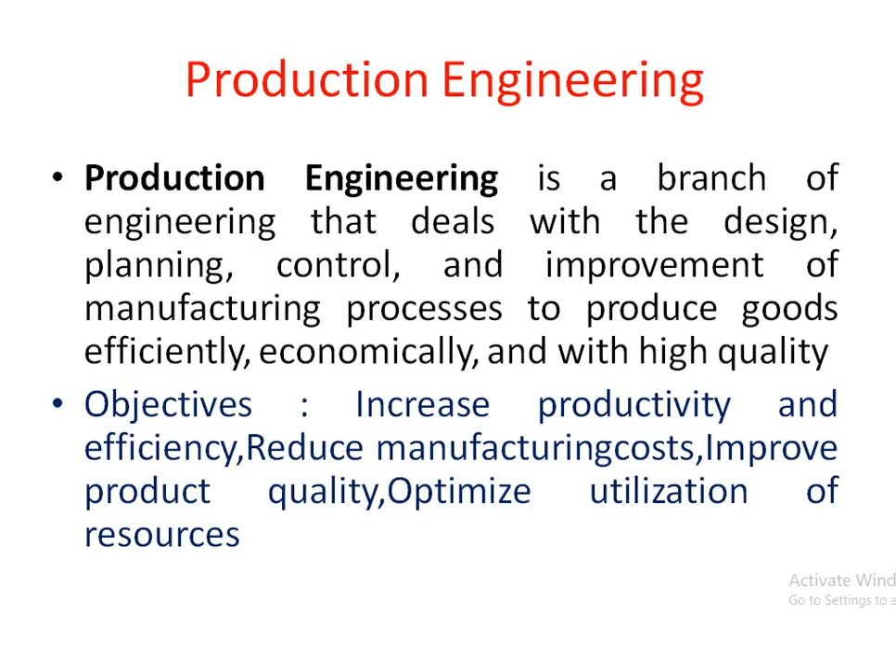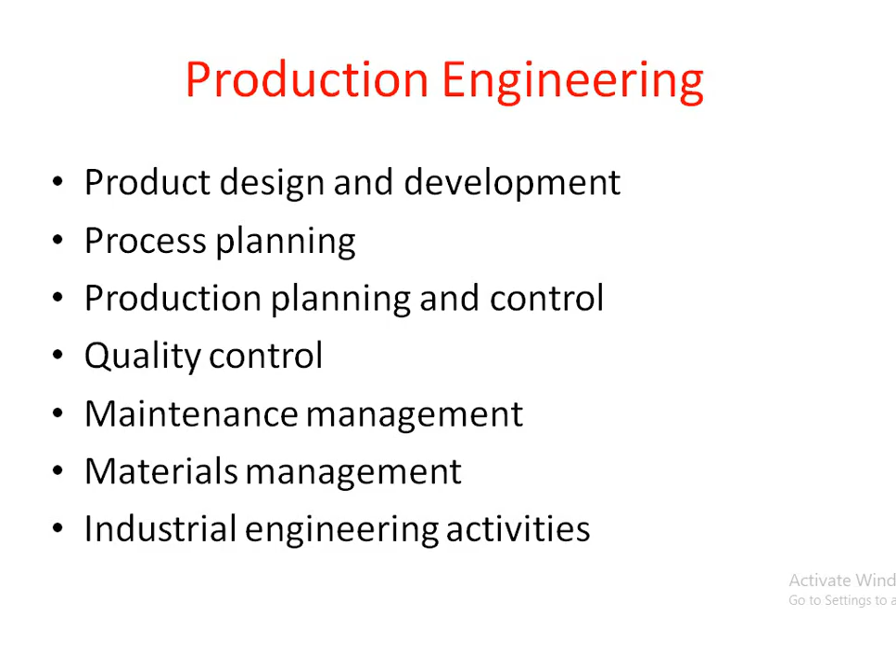The objective of every industry is to increase productivity and efficiency. Apart from that, it is reducing manufacturing cost, giving emphasis on product quality, and optimum utilization of resources. So production engineering covers product design and development, process planning, production planning and control, quality control, maintenance, materials management and industrial engineering activities. All these come under the roof of production engineering.

Today we will have a short difference between manufacturing and production. Manufacturing is nothing but the conversion of raw materials into finished products. That is called manufacturing. But what is production? Production is nothing but the creation of goods or services to satisfy human needs.

So conversion and creation are the two important points to be considered while comparing manufacturing and production. In manufacturing, there is conversion of raw material into finished products, but in case of production, we have to create the goods or services to satisfy the human needs.

So what is the input required for manufacturing? That is raw material, machine and labor. These are the inputs required for manufacturing. But in case of production, the input criteria are resources, labor, capital and technology.

Manufacturing is nothing but conversion of raw material into finished products, and for that you need only raw material, machine and labor. But in case of production, apart from this, you need capital also, technology also.

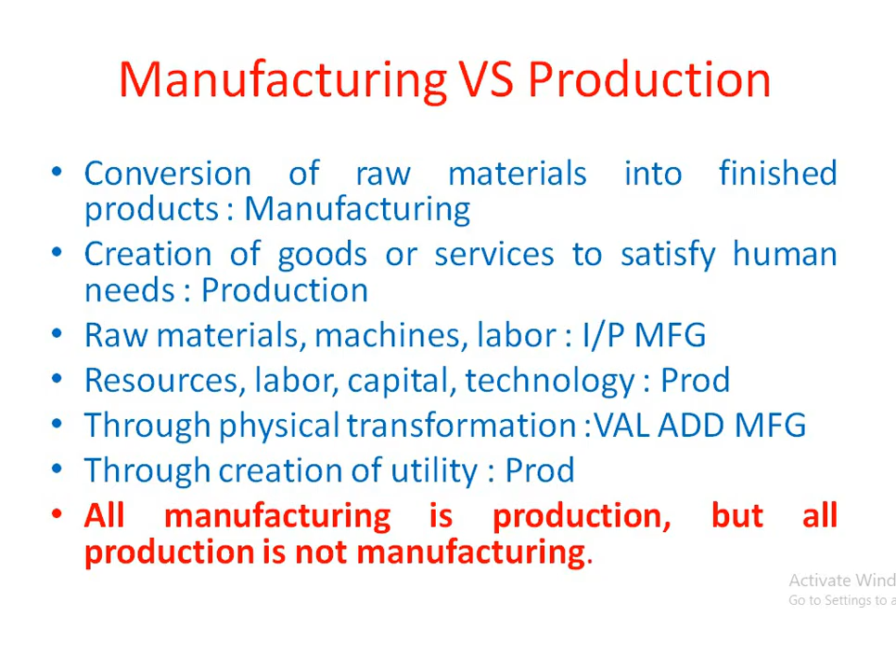In case of manufacturing, we add value in terms of physical transformation - from a particular product or raw material, you give some shape so that you can add value to it. But in case of production, you have value addition as creation of utility. So most importantly, all manufacturing is production, but all production is not manufacturing. Every production is not manufacturing, but every manufacturing is production.

So there are different branches of production engineering, which includes production planning and control, in short PPC. What does it cover? It covers routing procedure, scheduling, dispatching and follow-up. Routing means you have to make a proper route of the material or product flow. Then you have to schedule how to route this. And also you have to have dispatching idea - how to dispatch, where to dispatch, and where to stock the products and how to dispatch it, and most importantly you have to take the follow-up of all the things. This is the role of a production planning and control engineer.

Industrial engineering, one of the finest branches of engineering, deals with work study, time study, method study and productivity improvement. One more thing I will add is work measurement. So work study, time study and method study are important parameters for any manufacturing industry.

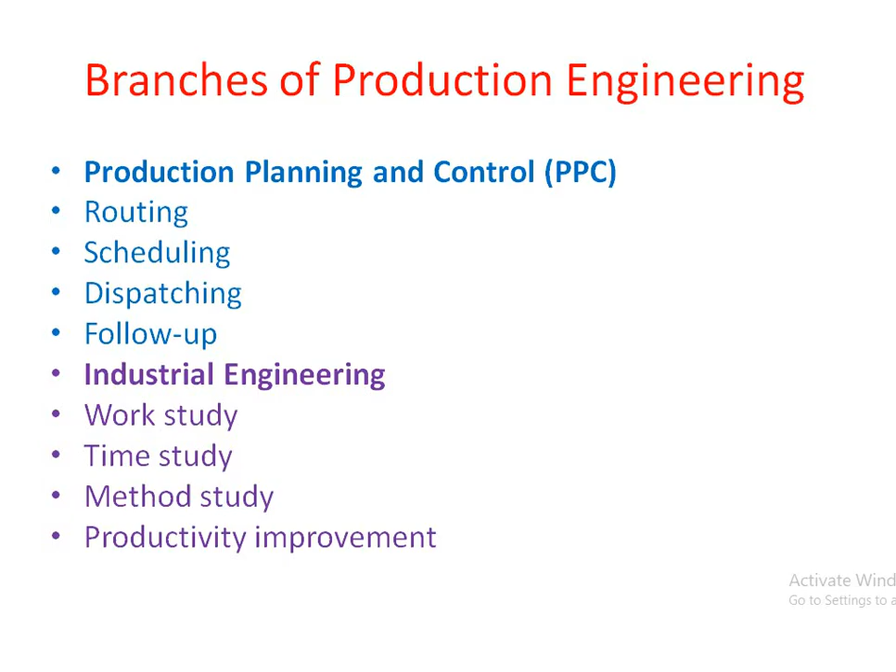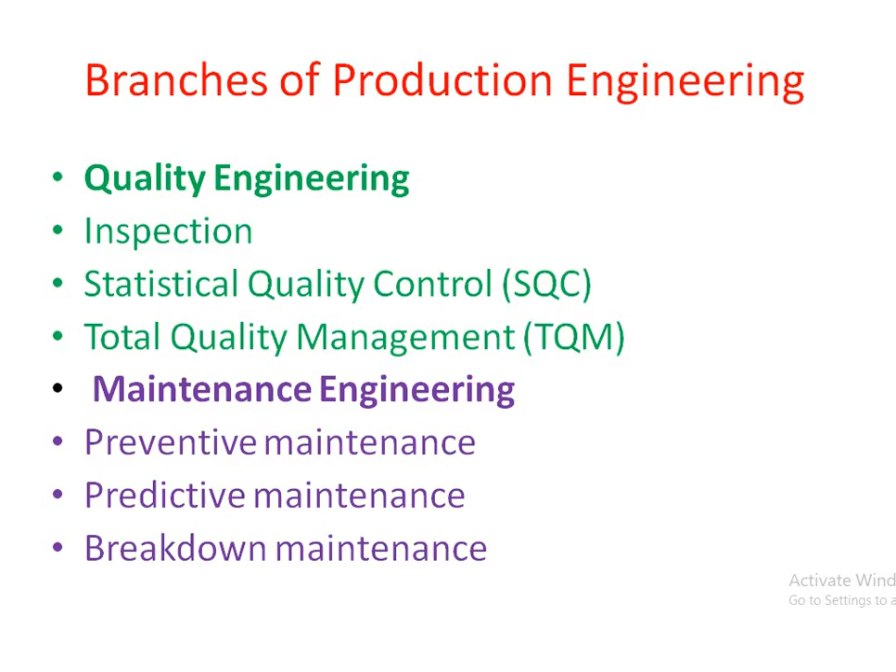Quality engineers will do work like inspection, statistical quality control, and total quality management. Maintenance engineers will do preventive, predictive, and breakdown maintenance. Material management plays an important role in controlling inventory, making purchases of material, and storing the material. Operation management or the operation engineer has to work on resource allocation, proper planning that is capacity planning, and production scheduling.

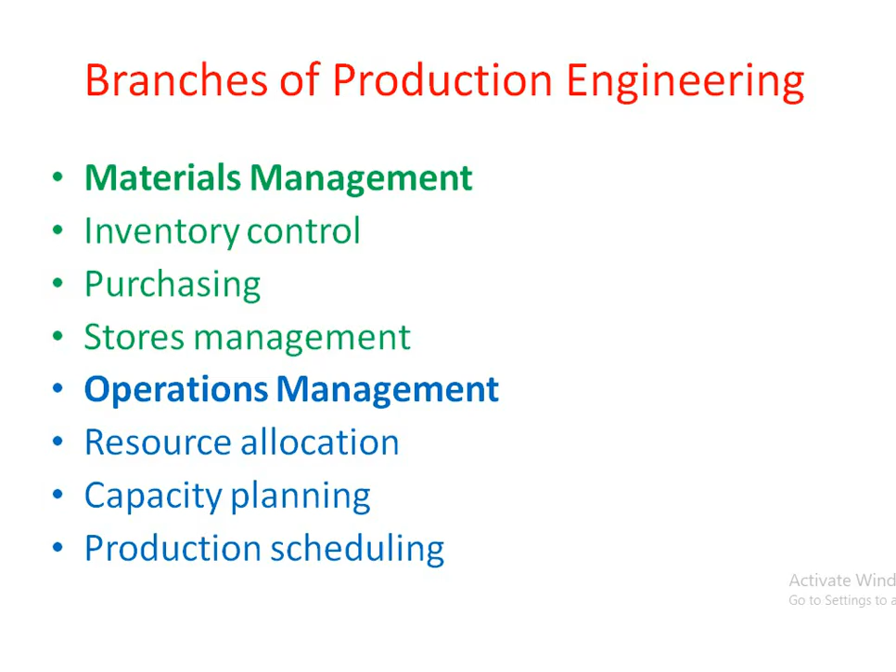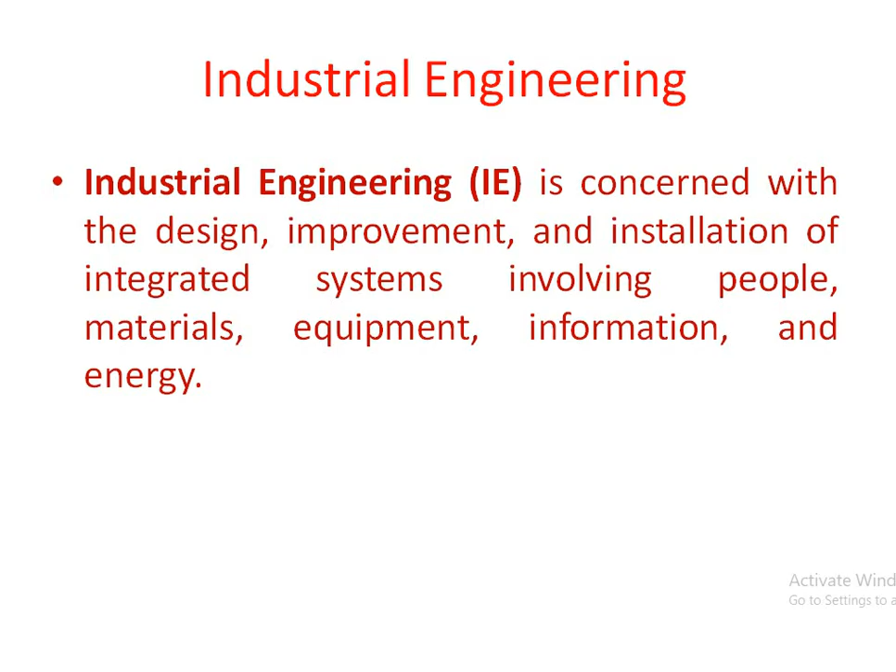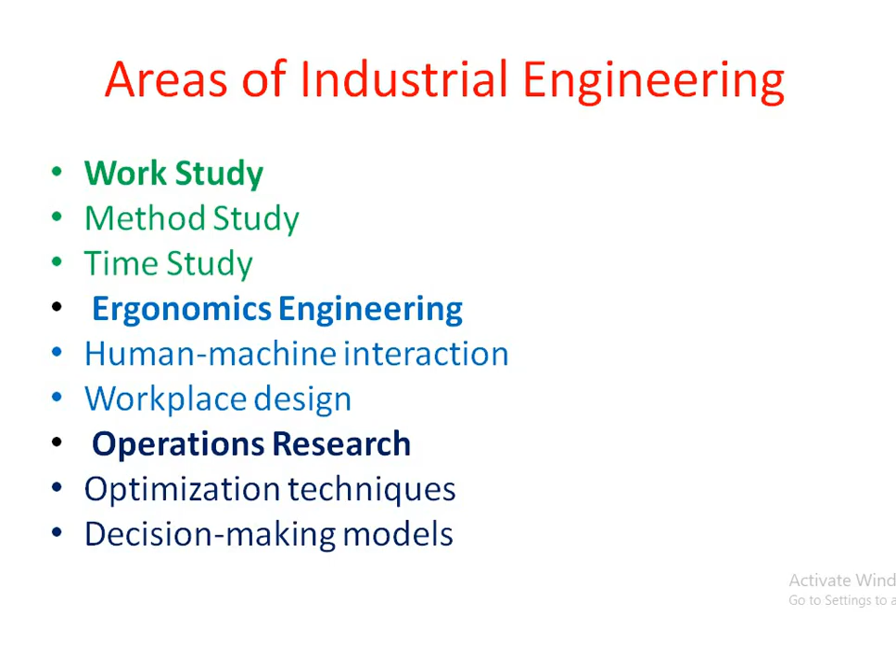So once again I am giving emphasis on industrial engineering, which concerns the design, improvement and installation of integrated systems involving people, material, equipment, information and energy. Broadly, the areas of industrial engineering, as we discussed earlier, are work study, which includes method study, time study, ergonomic considerations such as human machine interaction and workplace design, and operation research, which involves optimization techniques and decision making models.

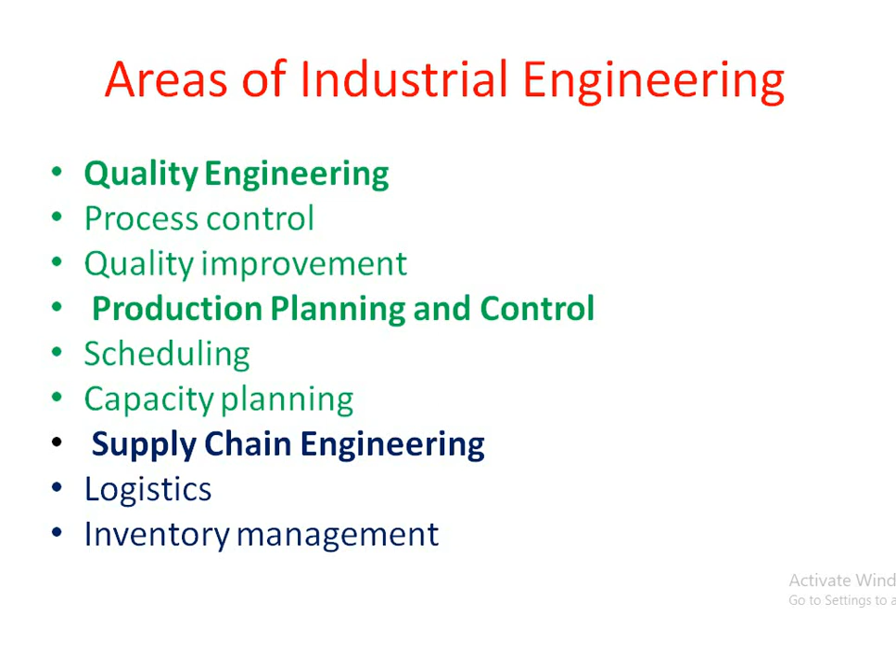Again, we have quality engineering, which covers process control and quality improvement. We also have PPC and supply chain engineering, which is now emerging, that is logistics and inventory management.

So shortly we will discuss work study and method study, an overview. Work study is defined, according to ILO, the International Labour Organization, as the systematic examination of methods of carrying out activities to improve the effective use of resources and set standards of performance.

So work study always does the systematic examination of the methods used for carrying out different activities, which are used to improve effective resource use and set standards of performance. That is, resource allocation and resource utilization are the most important parameters for using proper resources.

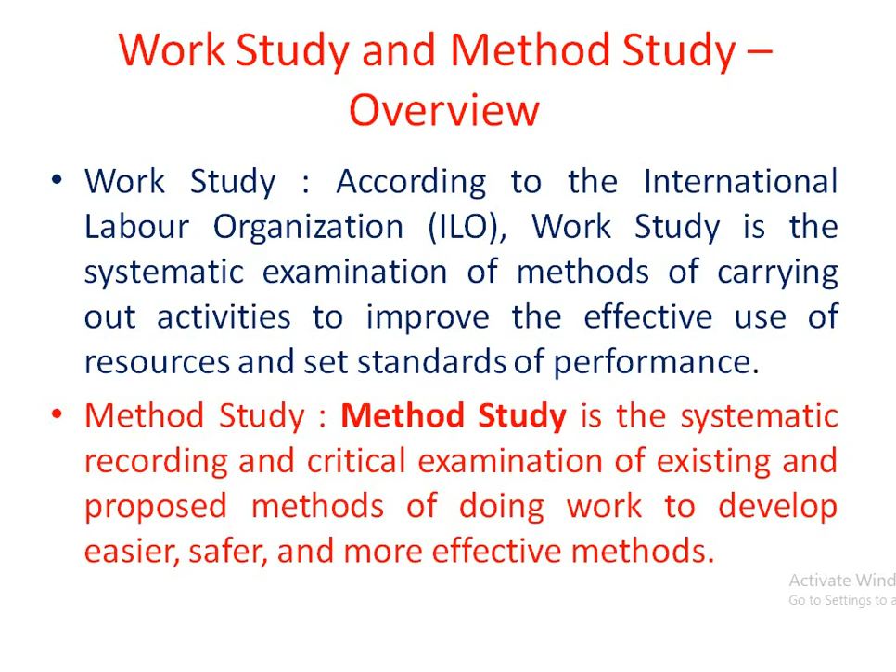Method study is the systematic recording and critical examination of existing and proposed methods of doing work to develop easier, safer and more effective methods. That is, the methods already being done in the industry, you have to record those methods, critically examine them, and you also have flexibility to propose methods that will be easier, safer and more effective.

So how to do method study? This is the way you have to do method study, which is called SREDIM. S stands for select the work to be studied. What work you are going to do, you have to select it first, and then record all the relevant facts regarding that particular work which you have taken into consideration.

Then examine the facts. Whatever facts you have recorded, you have to examine them very critically. Once you do these things, you have to develop an improved method. Again, you compare that method with the previous method, so that if there is any lacuna, you can make those particular changes to develop a very improved method.

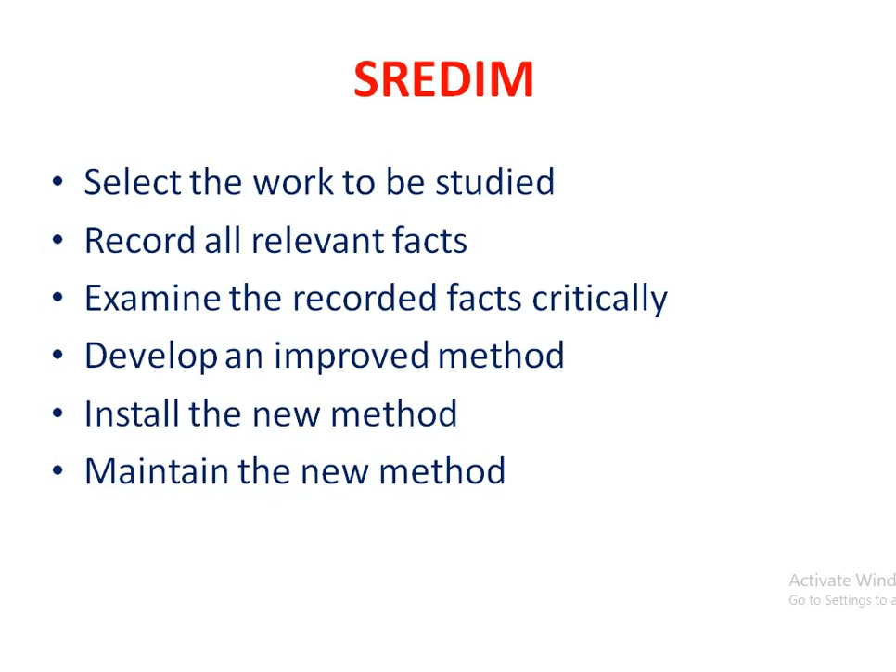Once you have developed that method, you have to install it and then maintain the new method which you have developed.

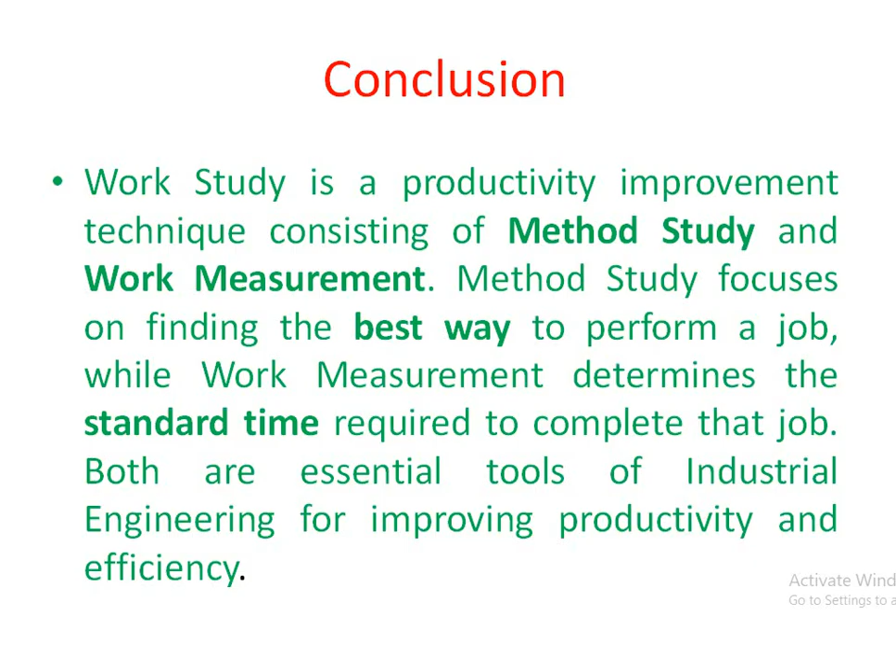So in conclusion, we can say work study is nothing but a productivity improvement technique, consisting of method study and work measurement. So work study has two branches: method study and work measurement. Method study focuses on finding the very best way to perform a job, while work measurement determines the standard time required to complete that job. Both are essential tools of industrial engineering for improving productivity and efficiency.

Now we'll discuss the next part, forecasting. Forecasting is nothing but prediction, regarding what is the demand, what will be the sales, what will be the production, what will be the conditions. All these come under the roof of forecasting.

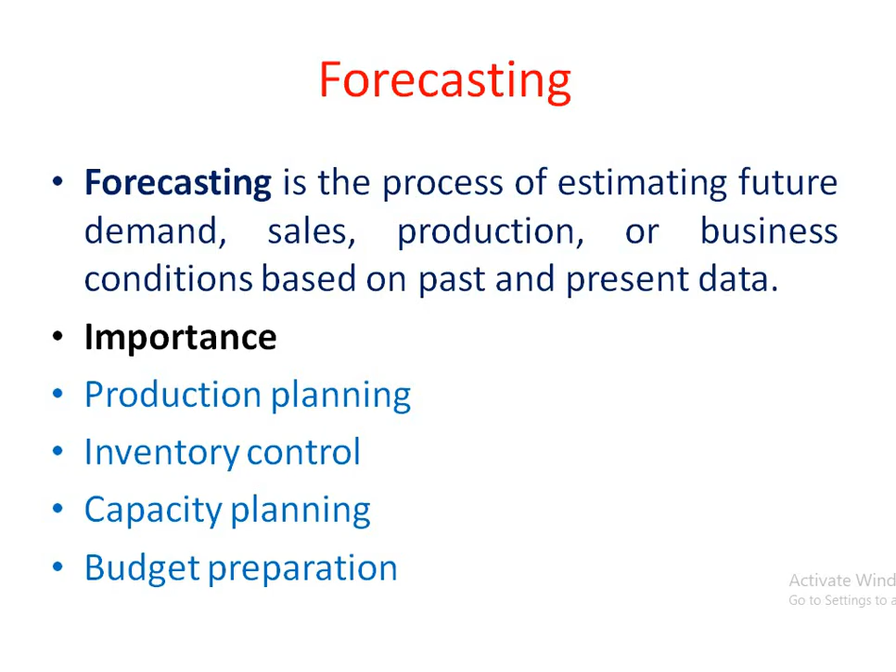So why do forecasting? Once you do the forecasting, you should go for planning regarding what you have forecasted: how much inventory you are having, whether you have excess or less inventory, what inventory control you need to do, what is your capacity, whether you can fulfill the particular demand, whether you have the resources and budget to fulfill that demand. All this comes under capacity planning and budget preparation.

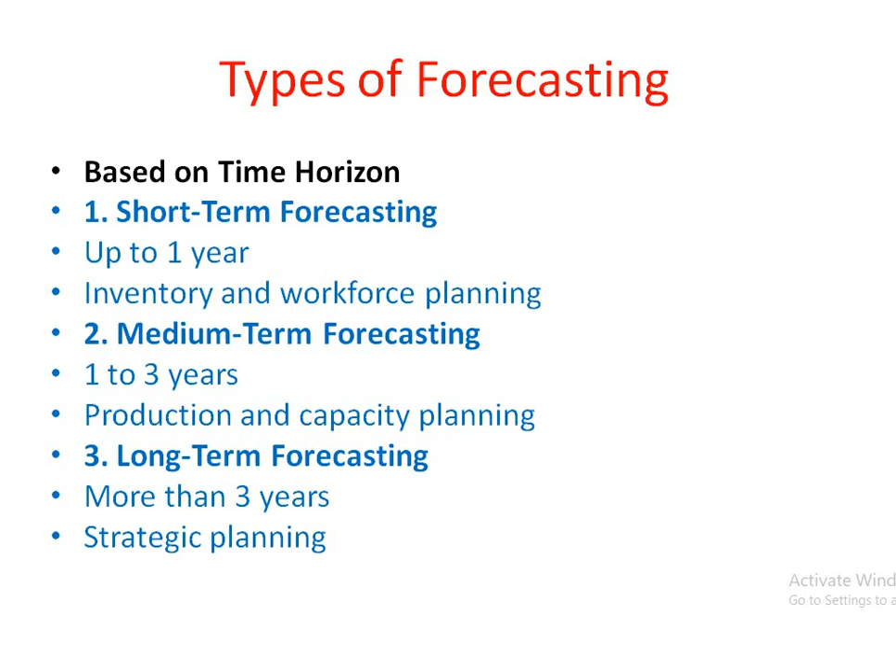Based on the time horizon, forecasting is classified as short-term, medium-term and long-term forecasting. Short-term forecasting is up to 1 year, covering inventory and workforce planning. Medium-term forecasting ranges from 1 to 3 years, covering production and capacity planning. Long-term forecasting, more than 3 years, covers strategic planning. This is how, based on the time horizon, forecasting is classified.

On the basis of method, you have qualitative and quantitative forecasting. Qualitative forecasting includes expert opinion, Delphi methods, and market surveys, while quantitative forecasting, where you need to find out the quantity, includes methodologies such as time series analysis, moving average, exponential smoothing and regression analysis. These are the different methods used for forecasting.

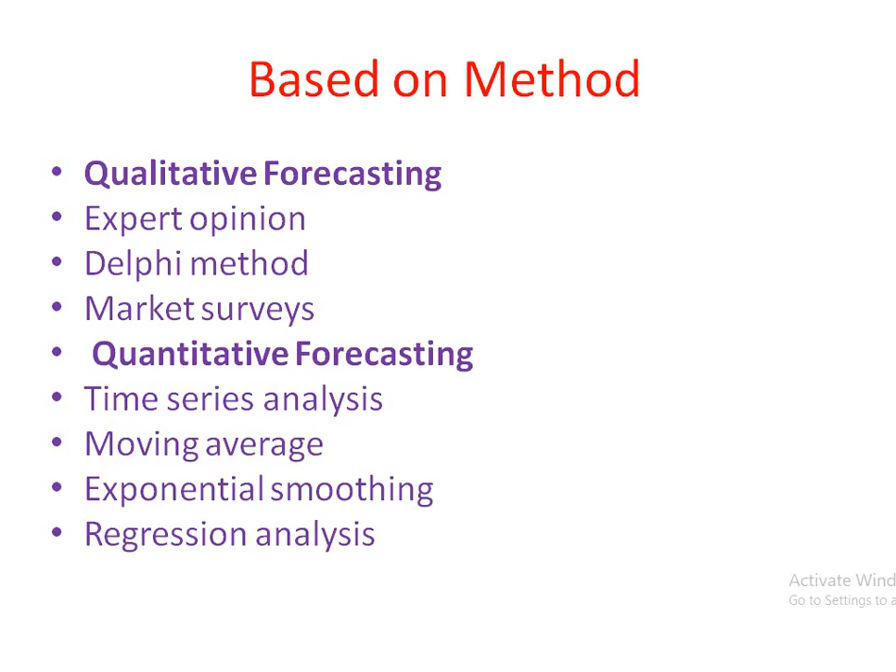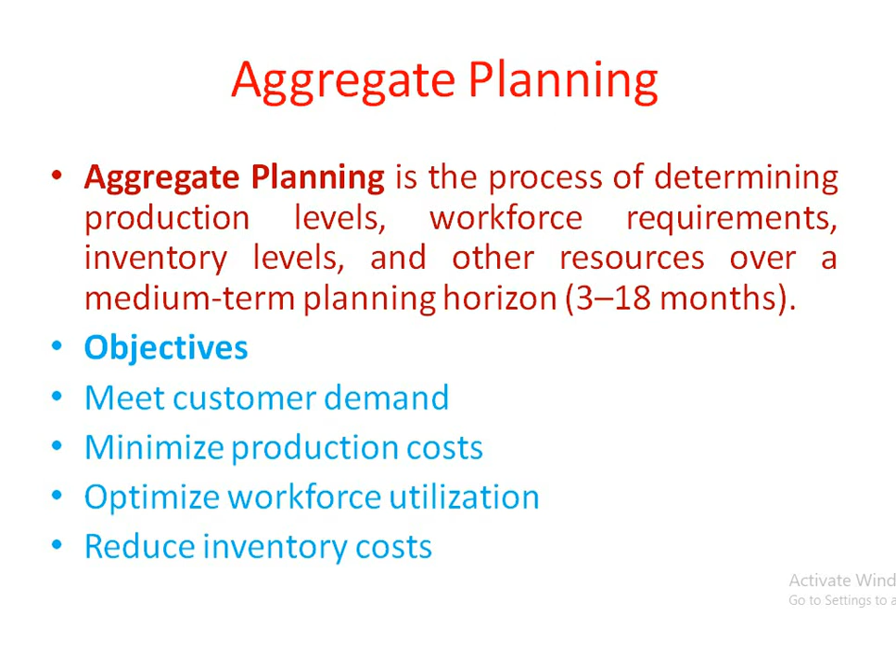Coming to aggregate planning. Aggregate planning is nothing but the determination of demand and production. It is the process of determining production levels, workforce requirement, inventory levels, and other resources. It is a kind of medium term planning which ranges from 3 to 18 months. The objectives are to meet customer demand, minimize production cost, optimal utilization of resources, and reduce inventory costs.

There are different strategies for aggregate planning. First is the level strategy, in which there is no change in the production rate and the workforce is stable. There is no hire and fire method in this case. There is a constant production rate and a stable workforce, but inventory absorbs demand fluctuations in level strategy.

Chase strategy is exactly opposite of that. It has to be adjusted according to production rate, according to demand. So according to demand you can change the production rate, vary the workforce, hire workforce if the demand is more. In some cases you have to install new machines. All this you have to do to meet the demands, and this is a kind of hire and fire method. The third one is the hybrid strategy, commonly used in industries, which is a combination of both level and chase strategy.

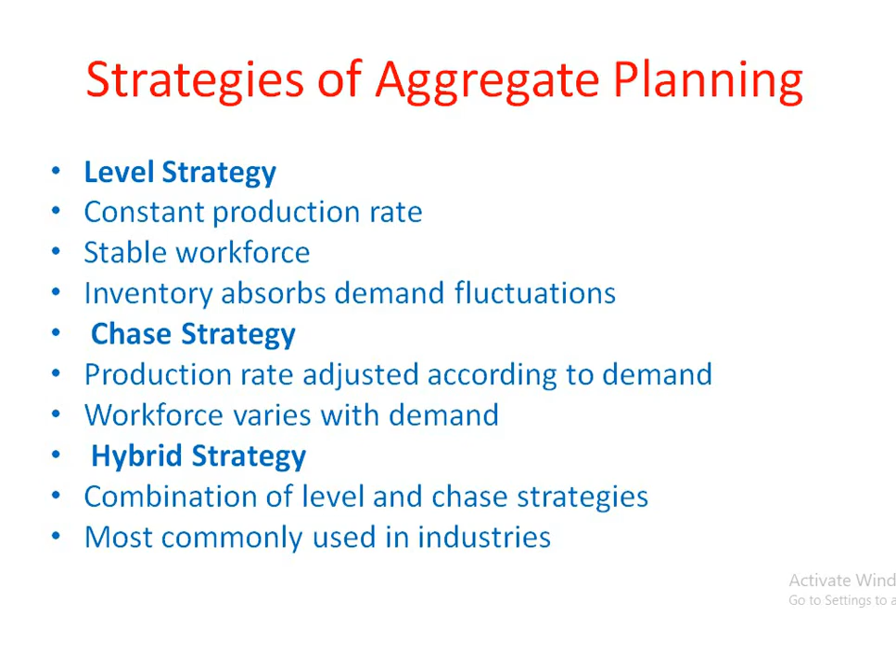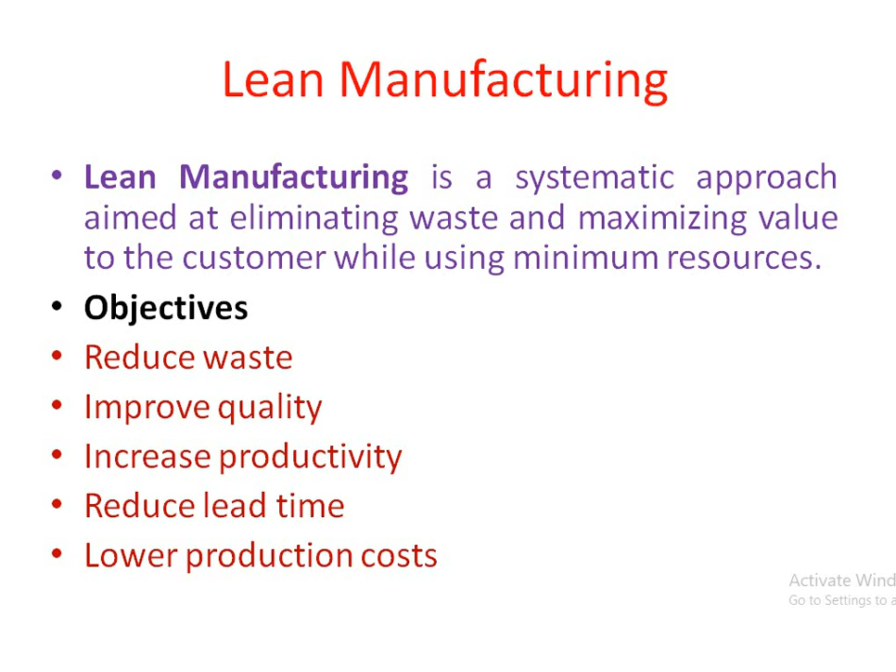One more aspect is lean manufacturing, which is a systematic approach for eliminating waste and maximizing value to the customer with minimum resources. The major objective of lean manufacturing is to reduce waste, improve quality, increase productivity, and lower production costs. So the principles of lean manufacturing include: identify first the value.

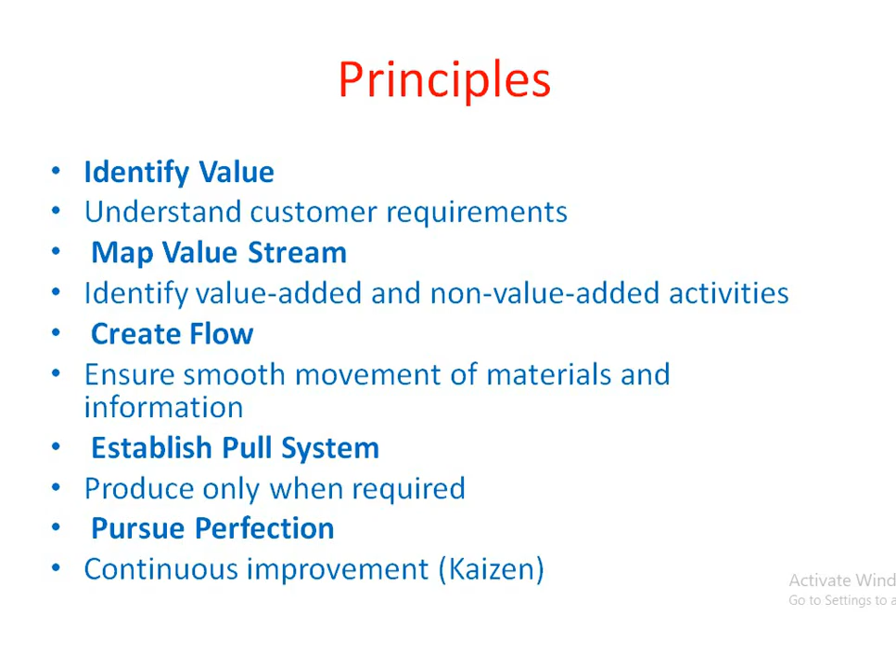That means you have to understand the customer requirement, what the customer needs. Then you have to map the value stream, that is identify what are the value added and non-value added activities, and remove as much as possible the non-value added activities. Then you create a flow, that is the smooth movement of materials and information. Then use the pull system, that means produce only when it is required, don't produce more than what is required. And go for perfection, that is continuous improvement such as Kaizen.

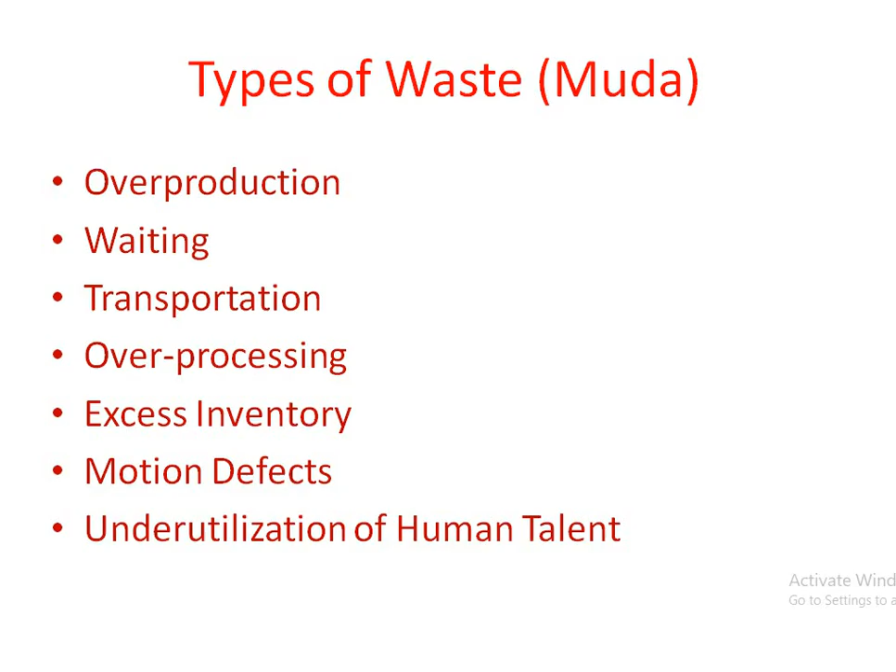In lean manufacturing you will find 7 types of waste, called MUDA. One is overproduction - don't go for overproduction. There should not be any waiting time. You have to reduce transportation cost as much as possible. There should not be any overprocessing. There should not be any excess inventory. There should not be any motion defects, and there should not be any underutilization of human talent. You have to put the person in the right place, right time, right work, so that you will have a proper production process. So: overproduction, waiting, transportation, overprocessing, excess inventory, motion defects, and underutilization of human talent - these are the types of waste you have to look into very carefully.

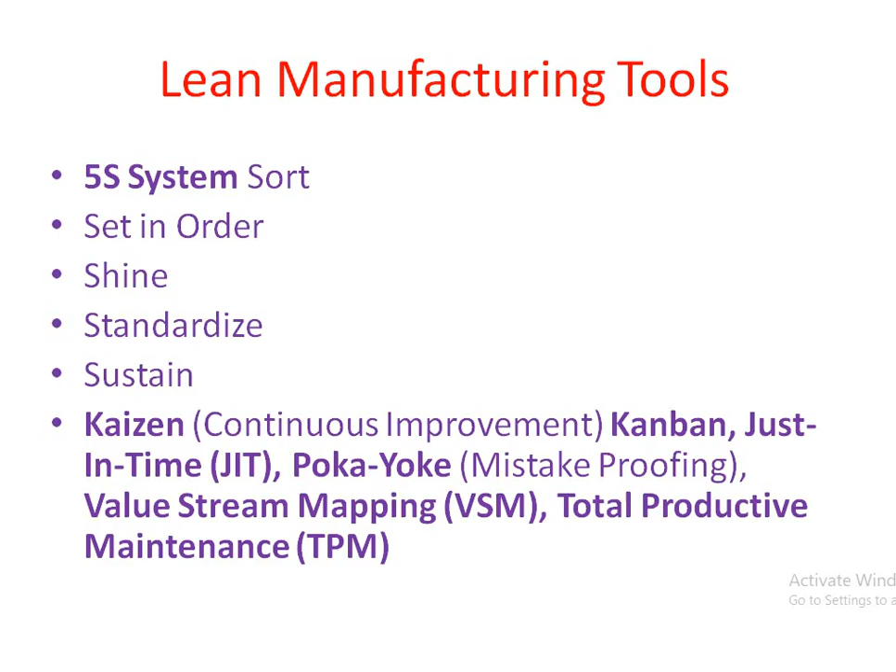Lean manufacturing tools include the 5S system that everyone knows. S stands for sort, set in order, shine, standardize and sustain. More tools are Kaizen, which gives emphasis on continuous improvement; Kanban system; just in time system; Pokayoke system, which is mistake proofing; value stream mapping; total productive maintenance. Also you have single minute exchange of die, meaning, for example, a press machine setup time reduced from 60 to 10 minutes through quick change tooling.

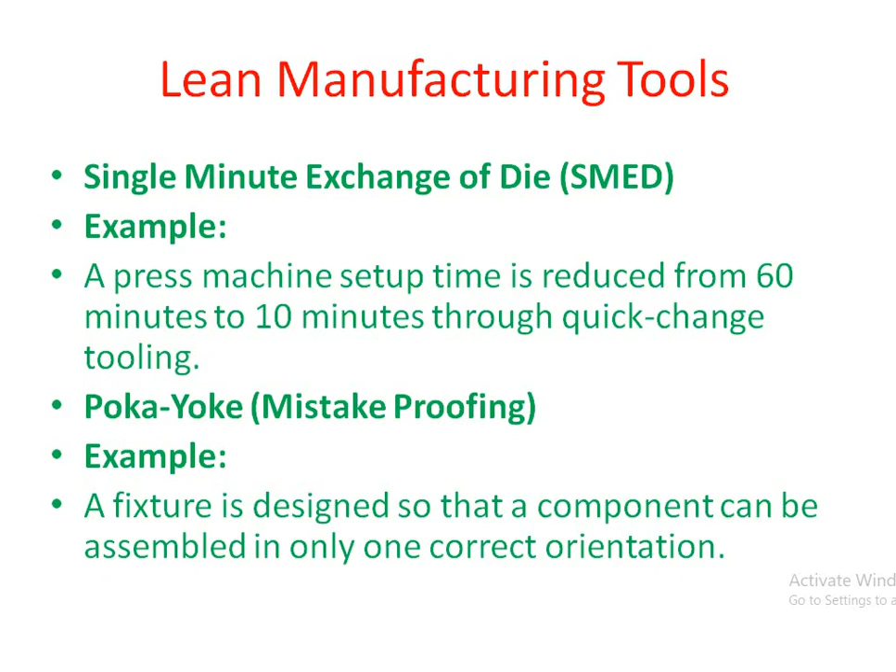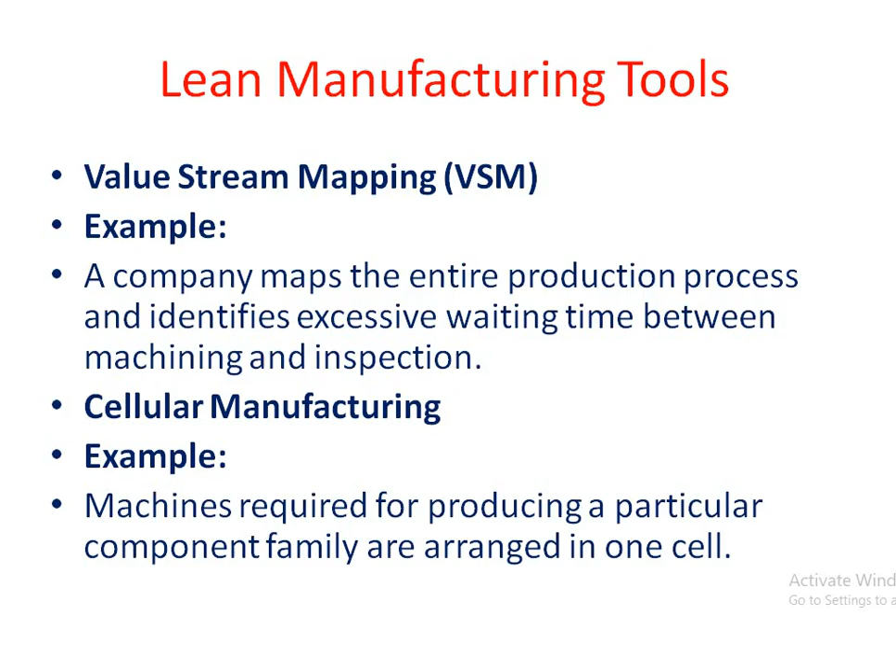Pokayoke means mistake proofing - you design a fixture so that a component can be assembled only in one correct orientation. Value stream mapping means looking at the entire production process so that excessive waiting time is reduced. Cellular manufacturing means machines required for producing a particular component family are arranged in a particular cell. And Kaizen is nothing but continuous improvement.

So friends, we have discussed in short about production engineering and its scope. Hope I have cleared some of your doubts. In the next lecture we'll discuss more about different aspects of production engineering. Thank you very much.